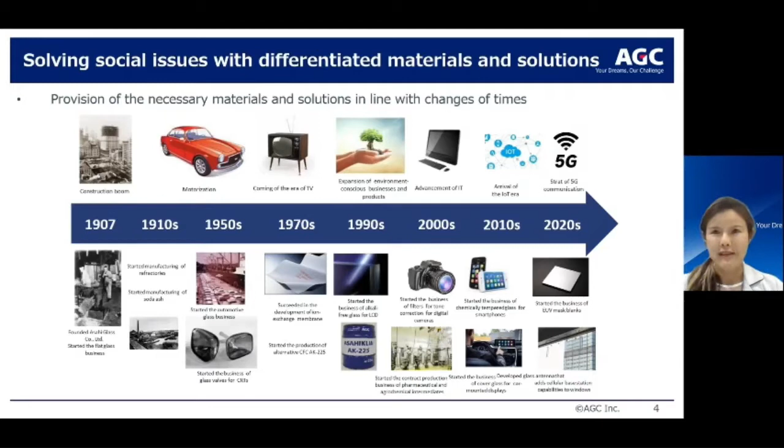To realize our Vision 2030, AGC Group aims to create a sustainable economic and social value by transforming our business portfolio. In addition to meet our financial targets, we also want to achieve a balance between business growth and realization of a sustainable society.

We will strive to achieve the sustainability mission in all our business activities and contribute to the resolution of these 5 key social issues. The AGC Group aims to achieve net zero carbon emission by 2050 and pledge to reduce our total CO2 emission through energy saving and energy creating products. Specifically, a 30% reduction in greenhouse gases emission by 2030 and a 50% reduction in greenhouse gases emissions per unit of sales to realize a sustainable global environment.

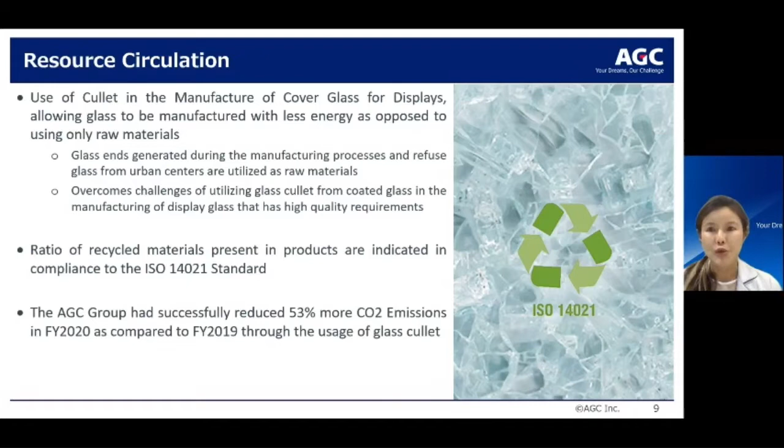The ratio of recycled material present in products is indicated in compliance to the ISO 14021 standard. The AGC Group has successfully reduced 53% more CO2 emission in the year 2020 as compared to 2019 through the usage of glass cullet.

In response to the need to balance realizing low global warming potential whilst maintaining the energy conservation performance of refrigerants for air conditioners, AGC has created AMOLEA products that contribute to the environment. This is a next generation fluorinated, non-flammable refrigerant and non-flammable solvent with low environmental impact while keeping high performance effect. AMOLEA series received the Minister of the Environment Award at the Japan Association for Chemical Innovation Green and Sustainable Chemistry Awards in 2020.

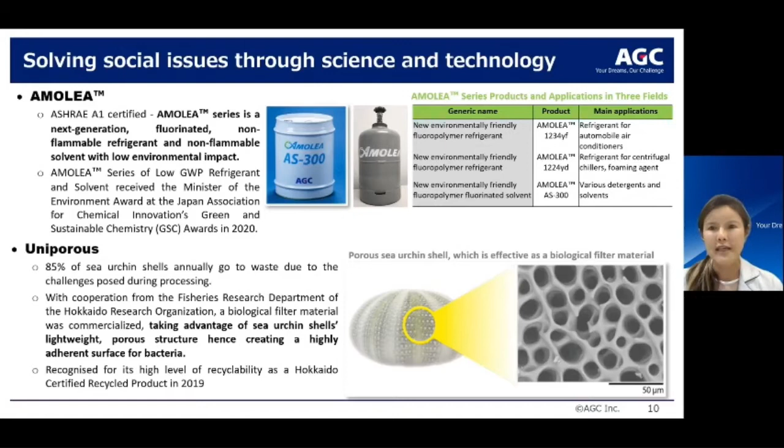Uniporous, on the other hand, is a biological filter that is made from sea urchin shells. 85% of shells go to waste yearly due to the challenges and time required during processes. We aim to resolve this social issue with the cooperation from the Fisheries Research Department of the Hokkaido Research Organization. Uniporous was recognized for its high level of recyclability as a Hokkaido certified recycled product in 2019.

In a bid to reduce freshwater consumption, the AGC Group is promoting wastewater recycling alongside a reduction in clean water usage and wastewater through water filtration. As part of our efforts to prevent water pollution, we have established wastewater control targets that are tailored to the characteristics of each site.

These are the result of our efforts to utilize water resources more efficiently. 85% of water used for cleaning and cooling in production processes are seawater that are used for indirect cooling. The amount of fresh water recycled or cascaded in the production process is equivalent to approximately 16 times the amount of fresh water used.

In summary, as part of AGC's commitment to creating a sustainable future, we have outlined the fundamental approach as follows. To establish a long-term goal of achieving net zero greenhouse gas emission by 2050, promote zero landfill, and continue steady progress to reduce the amount of waste generated.

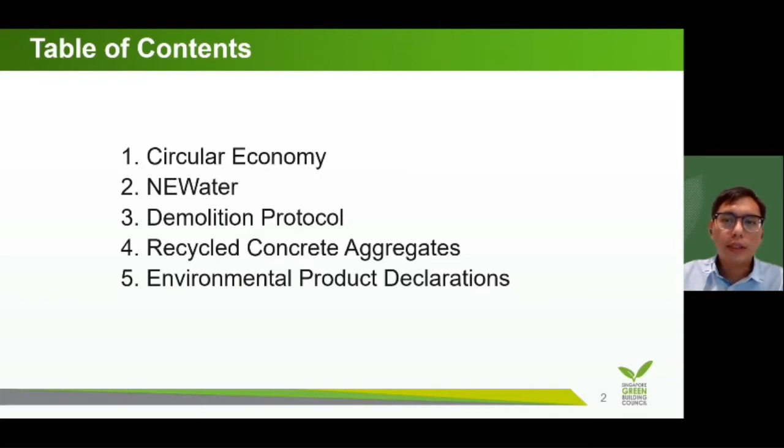So let's kick off with the circularity aspect. Circularity is essentially addressing the shift from a linear economy model to a circular economy model. In a linear economy, resources are used in a straight line from extraction of Earth's raw materials, moving to the in-use phase, before reaching the end point as disposal of waste goods and materials. In this model, resources are extracted and designed for single-use life cycles.

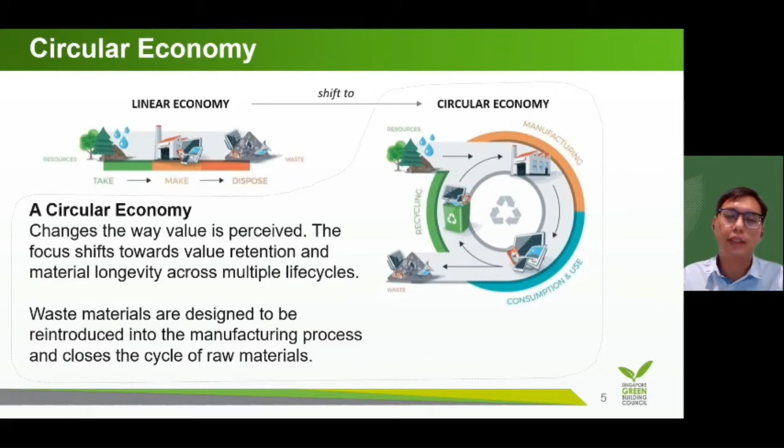And that really is what circular economy is all about, right? The purposes are to address scarcity of resources, balancing out too much demand for too little supply. It is to use resources more efficiently, more effectively, and to reduce waste and to reduce environmental impacts.

So now that we've talked about circular economy, let's move on to the Singapore case studies. The first one is Newater, just to bridge it a little bit. Newater is actually the third of Singapore's national taps, the 4 sources of water that we have. Newater was launched in 2003 to the public, and it is a concept whereby used water from households and industries are reclaimed, and they go through a purification process before reintroduction to our water supply.

So the purification process is a 3-step approach involving microfiltration, reverse osmosis, and then ultraviolet disinfection. Now, the Newater that is resultant of this process is actually used in industrial estates, commercial buildings mainly. In times of dry periods, this can also bolster our local catchment water as part of our potable water supply.

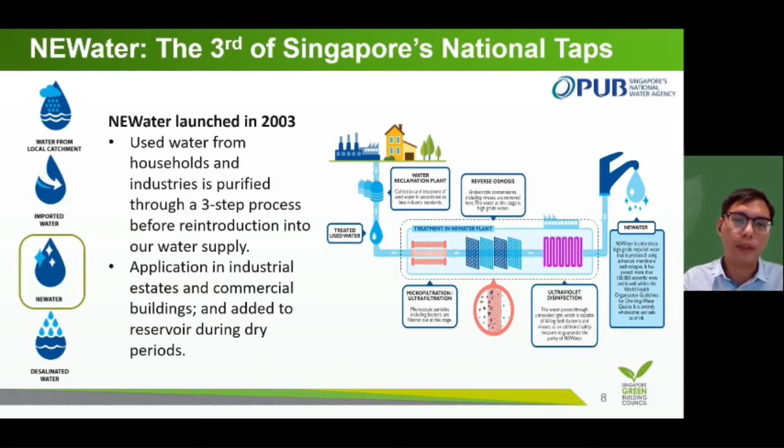Currently, Newater supplies up to 40% of our national water demands, as compared to, for example, desalinated water, which is 25%, or imported water, 50%. So you can see that we are trying to ramp up the capabilities in Newater by 2060 to become more self-sufficient as our water agreement with Malaysia ends in 2061. So it is a national strategic item that also encompasses the circular economy model of reintroducing used water back into the water loop.

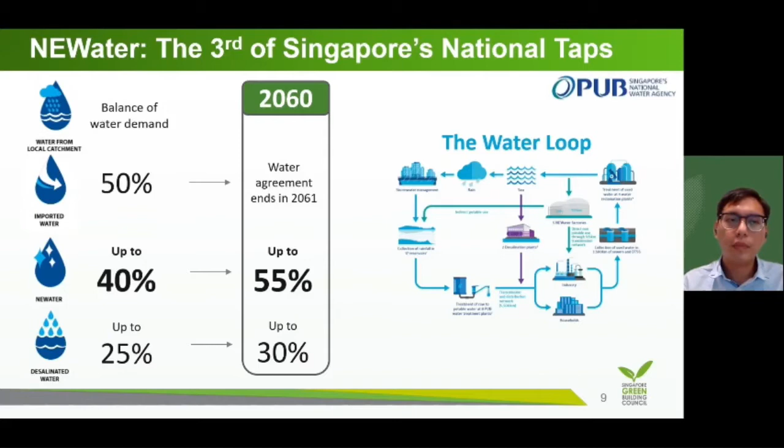The next case study, more for the building industry now, is on recycled concrete aggregates. Recycled concrete aggregates are alternative materials to the raw aggregates or more raw concrete fines that is used in cementitious products or concrete mixtures. But before we jump to recycled concrete aggregates, we first need to understand a little bit about the Demolition Protocol. The Demolition Protocol is captured in the Singapore Standards, SS 557 2010 edition, Code of Practice for Demolition. This has actually been in use under a different name since 2002.

The key three items here are: one, the pre-demolition audit; two, the sequential demolition; and three, the site waste management. These are very important items under our demolition protocol.

The demolition audit happens when a building is identified for demolition. We first do a stock take and inventory of the materials in that building, identifying what is reusable, what is recoverable, what has been contaminated, and what has to be disposed of. We run through the whole list of building product categories such as pipes, wiring, concrete, and bricks to sort and note what can be recycled.

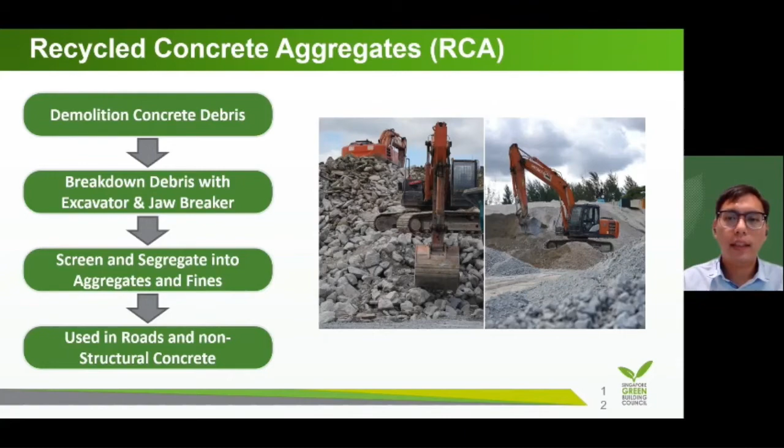But let's take that one step further and talk about the Samwoh Eco-Green building. Samwoh is a builder and contractor, also part of SGBC members, and they initiated a research project collaborating with public agencies and institutes of higher learning to study and investigate more about recycled concrete aggregate concrete.

The study found that when comparing traditional concrete versus concrete containing RCA, there's actually an insignificant difference. Structural monitoring results also showed that deformations were within theoretical deformations. The study concluded that RCA concrete can be designed for structural application.

And this is where the birth of the Samwoh Eco Green Building comes about. For all the concrete components of this building, they were actually made with RCA concrete, not traditional concrete. Even more so, the RCA concrete is actually found to be up to 100% RCA rather than fresh raw material aggregates.

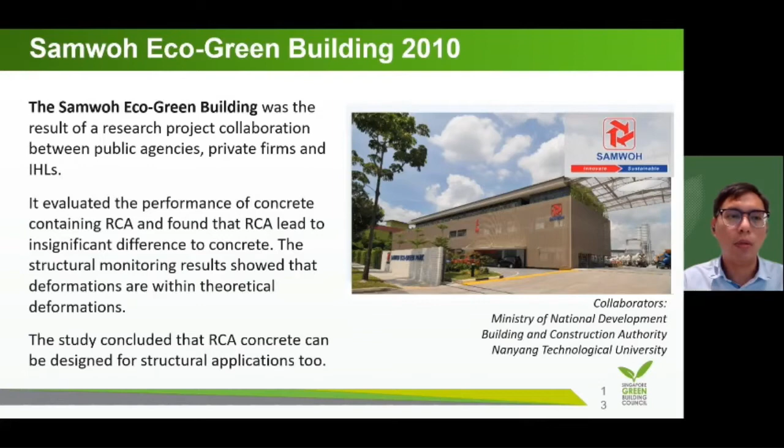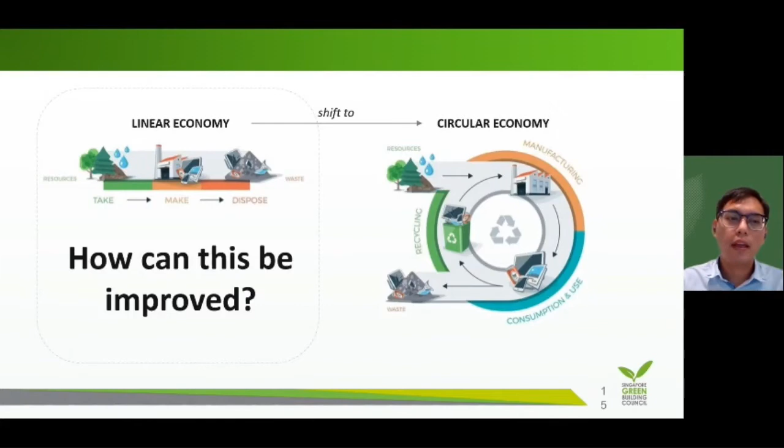I hope those two case studies have painted a picture of circularity in application in Singapore. Let me quickly move to resources and environmental product declarations. This becomes important because we have to acknowledge that not all materials can shift so quickly into a circular economy model. The key question becomes: how can we improve materials still trapped in the linear economy model? Compound onto that, carbon emissions of buildings — buildings are known to account for 39% of global carbon emissions.

In operational carbon, we know there is time to improve it due to advances in technology and shifts to renewable sources of energy. But there is not enough activity or initiatives on the upfront carbon aspect. Unlike operational carbon, the upfront carbon or embodied carbon performance cannot be improved over time — it is simply locked in upon building completion.

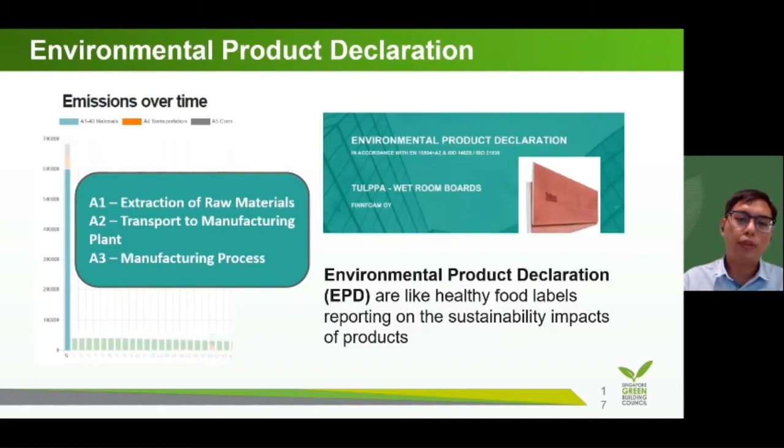This is where environmental product declarations can fill the gap. They are like healthy food labels that report on the sustainability impact of products. In comparison to healthy food labels that talk about sugar, fats, or protein, environmental product declarations have a series of environmental performance indicators.

If you look at the image on the right, I've singled out the GWP. GWP stands for global warming potential, and it tells us how much embodied carbon there is in this product based on its life cycle stages. This is measured in kg CO2e per unit of product, and this is like the currency we can use to compare products against one another.

So if you have, for example, two carpet products, you can use the GWP or kgCO2e amount to compare which of the two carpets has a lower carbon emission. You can see this is an enabler for suppliers to review and improve their products and processes to lower embodied carbon, and also an enabler for building project teams to select products that are lower in embodied carbon.

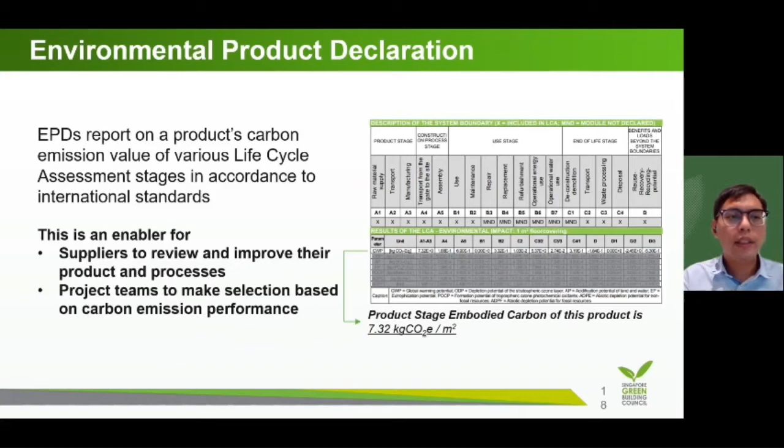So this will then help to decarbonize our built environment, especially on the embodied carbon front. It's a very short one. I could go into more detail, but I don't think we have the time for it.

I will leave you with a picturesque image of another angle of our CBD area, and wish you all a good day. I hope you enjoy this picture. For those who have not come to Singapore, here is what we have in a nutshell.

Thank you. Indeed, we really welcome you to come to Singapore. This is where the Garden City is, and we just celebrated our National Day. So yeah, welcome to Singapore.

Thank you to AGC and SGBC for sharing about their program. Moving forward, we will see how resource and circularity give us the opportunity to bring a lot of different resources together. Compared with climate action, resource and circularity seems more diverse, but it's also an opportunity for us to connect the dots and form a big picture.

Coming to connecting the dots and forming a big picture, I'm delighted to introduce this most resourceful partner of World Green Building Council. I don't think there's a second one to compete with this. She is no other than Miss Esther. She is really very resourceful, bringing all the happenings around the region, even around the world, and circling everything back to this core vision of what we want to achieve together. She's definitely our best friend in the Asia Pacific, also at World Green Building Council.

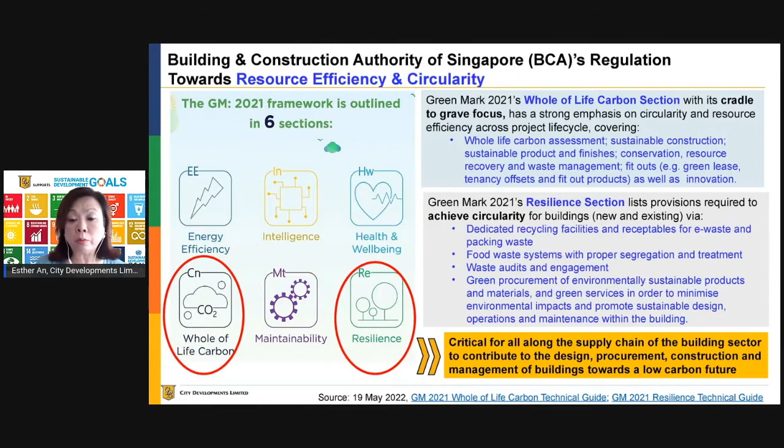And of course, these are some examples that we want to show that it is doable.

We all talked about the high impact already. Let me refresh it: close to 50% of global energy-related CO2 emissions is contributed by building and construction activities. Approximately two-thirds of our global building area that exists today will still exist in 2040. And by 2060, global building floor area is expected to double. If today we're already overdrafting our carbon budget, can you imagine if floor area doubles by 2060? What will the world become?

There is really an urgency for the real estate sector to align with global goals and accelerate our action by adopting a life cycle approach. How can we do it? We can't do it alone. We have to collaborate, innovate, and apply technology that is effective. But we also need to look at setting goals and measuring. Without tracking, without measuring, you can't manage.

That's why we adopted the global goals set out by the World Green Building Council, to reduce at least 40% of embodied carbon emissions by 2030. CDL's goal is actually to reduce by 41% by 2030, aligned with our science-based target initiative validated to a 1.5 degree scenario. All these are joining the dots together. If you want to keep global warming within 1.5 degrees, you have to set more ambitious targets. So in February 2021, we set the net zero target, and at Glasgow last year, we committed to support the World GBC's whole life carbon cycle.

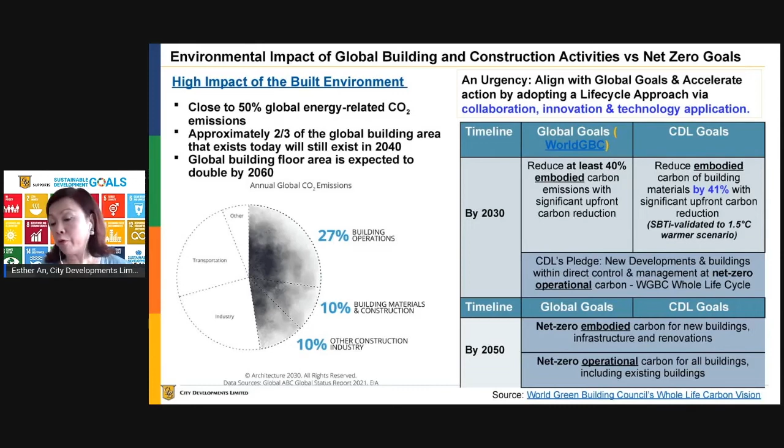The timeline we're looking at is also 2050 - we have to look at net zero embodied carbon for new and existing buildings, renovation, retrofitting, etc. Operational building carbon footprint is also very important, accounting for almost 30% of global greenhouse gas emissions. So as a landlord, we need to look at how we can retrofit and maintain a high level of energy efficiency and resource efficiency.

No point setting the target but not providing any guidance. So this is our so-called 3S green building framework, providing guidance for higher operational efficiency, low carbon and cost-effective building materials, and a livable and healthy environment. How can we help engage the whole ecosystem of stakeholders to achieve super low carbon performance, smart building, and sustainable building?

Under sustainable building, waste minimization and circularity is a key criterion. For CDL, we're very glad to have started our sustainability journey as far back as 1995. At that time, our focus was really on how do we conserve. But today, just conserving and mitigation is not enough - we need to look at regeneration, circularity, and how we integrate under our value creation business model to transition to low carbon emission.

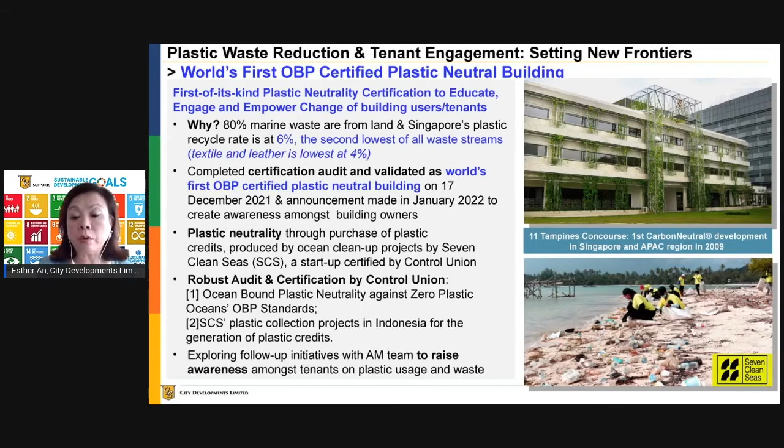This is a very first-of-a-kind plastic neutrality certificate to educate, engage, and empower change of building users' and tenants' behavior. We partnered with an NGO called Seven Clean Seas and a few globally certified plastic agencies. Tampines Concourse has achieved the first carbon neutral development in Singapore and the Apac region. Not just carbon neutral, but also plastic neutral, and why plastic, I have already explained earlier.

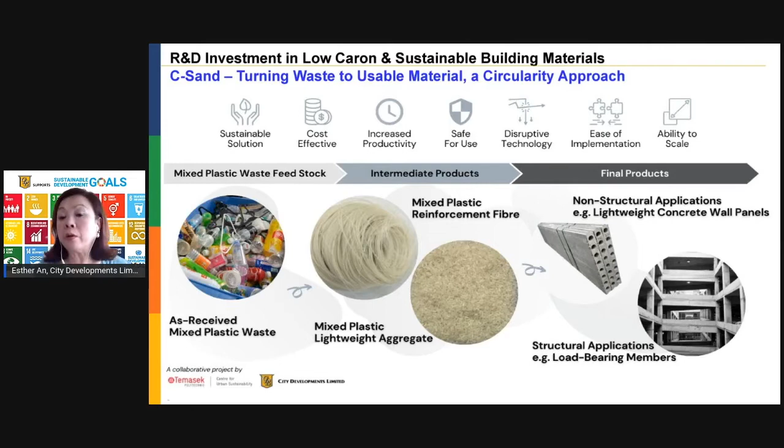Nothing will change if we don't invest in R&D, research and development. So we have engaged some academics and NGOs to look into low carbon sustainable building materials investment. This is one example, still a work in progress, called C-Sand, which is a sustainable alternative, turning waste into usable building materials and really putting the circularity approach into reality.

But we are very stringent in selecting social and startup. We hope that by engaging young people, engaging their creative minds, we can add to the industry's efforts, and hopefully we can all enjoy a net zero future. Thank you for your attention, and we'll be happy to share more.

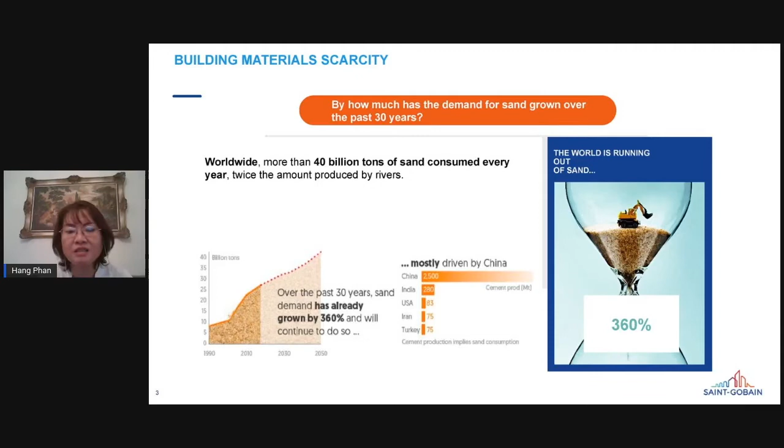In Southeast Asia, the situation is even worse because we have a lot of hydropower plants upstream that are worsening sand production for the countries downstream at the delta. More than half of the world's construction will happen in our region, so it is really a challenge for us, and the world is running out of sand. That is just one critical example of a key material for us.

I come from Saint-Gobain, a building material manufacturer, and it is really a dramatic problem. Resource scarcity is already bringing up costs, and it impacts directly on our competitiveness. For our survival, securing access to resources becomes more and more crucial.

We can't rely forever on virgin raw materials. We need to find alternatives to replace virgin non-renewable resources, and we need to do it now. Otherwise, we will face operational disruption. So it is not only about doing good, it is also about business risk.

So how do we tackle resource scarcity? In the previous presentations, all the speakers highlighted that when you connect the dots, circular economy is a very important element in the whole picture of circularity. Yes, circular economy is an enabler for sustainable development, as well as the net zero carbon future we are aiming for. So for us, we see circular economy as an effective way to address resource scarcity and at the same time bring down CO2 emissions.

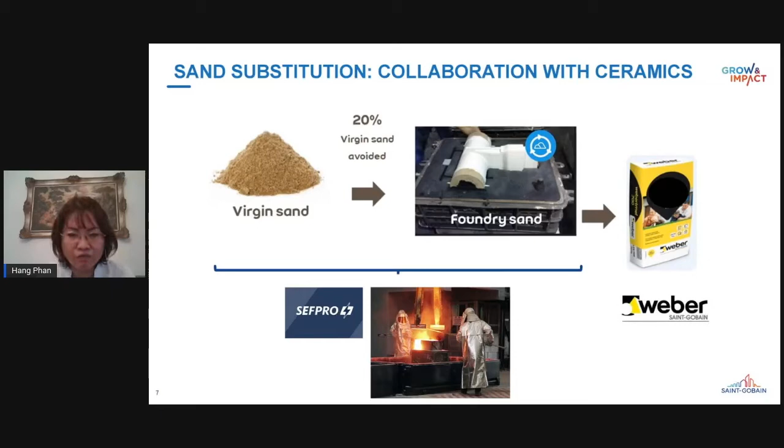For sand substitution, we collaborate with other businesses like ceramics manufacturers. To produce foundry molds, ceramic foundry companies use sand in their molding process, and after the foundry part has been cast, this sand can be recovered to be used in other businesses. We work with a company in China, SEFPRO, a foundry manufacturer, to recover foundry sand from their process to use in our mortar, under the brand name Weber. Through that, it helped reduce 20% of virgin sand use.

Now the cement substitution, which is more crucial and more difficult for us. Our strategy is to use waste from other industries, so it is a kind of external recycling. Here are two examples.

This slag, after the grinding mill process, becomes so-called GGBFS, which means ground granulated blast furnace slag or slag powder, and this can be used as a substitution for cement. This is processed by the steel manufacturer, and is available in big quantity in China, like 100 million tons, and we are using it as a substitution for cement.

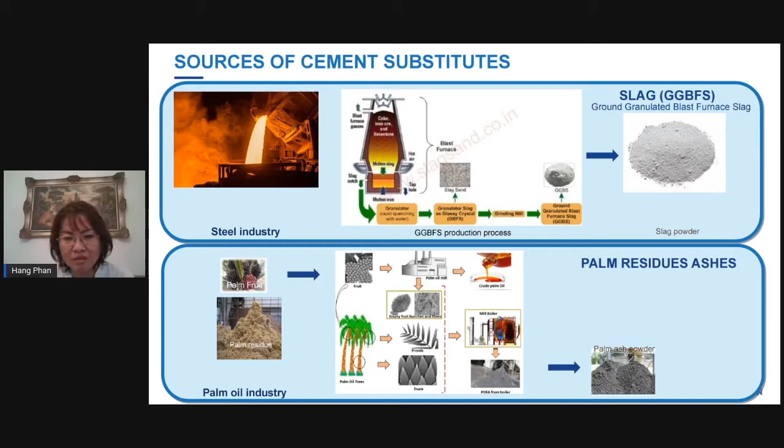The other source is the palm oil industry. The palm residue comes out from palm fruit processing, and when this is burnt, we receive palm ash powder, which can also be used as a substitution. This palm ash can be found in several different countries in the region. So these are the two main sources of waste that we are using in the region.

But one thing to keep in mind is that when we use waste as a resource, it's not straightforward to put into production. You can't just fit it into the production line - there's a lot of things to be considered. So here is our conversion process.

You know that waste cannot be transported too far for cost reasons. Normally the manufacturer has to consider what is available near the plant, let's say 80 to 100 kilometers away - what waste material is available that we can use. Then the regional R&D team has to characterize the waste, understand its components, and develop the binder and formula to suit the mortar application. So it's a team collaboration between the local team and the regional R&D team working together on this process.

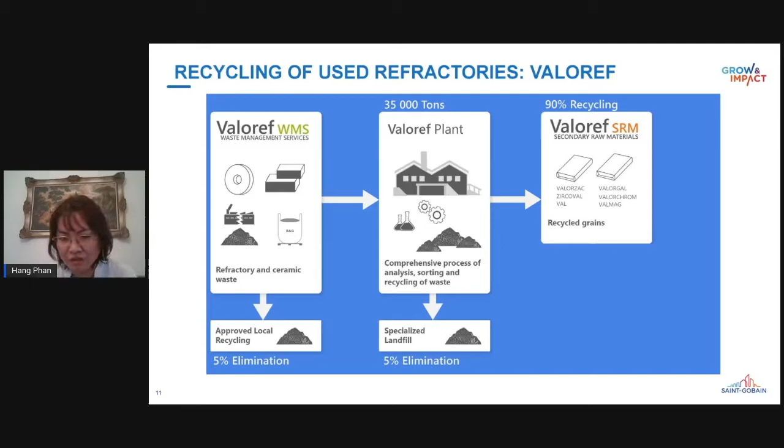So this is an ongoing project for us. You can see that circularity is a triple hit for a manufacturer like Saint-Gobain: it addresses the risk of operational disruption by providing an alternative to virgin raw material, helps reduce carbon emissions and address scope 3 emissions for developers, and also helps reduce operational costs. So this is not only good for the environment, but also good for business.

To do this, collaboration is crucial. Katrina mentioned collaboration as a keyword in the WGBC slide, and I totally agree, because no one can embark on this journey alone. Through my example, you can see that we have to work with partners, and innovation is the key enabler for us to really be able to get into this journey.

I hope that my practical example is helpful. If you have any more questions, you can contact me, my contact is here. Thank you very much for your listening.

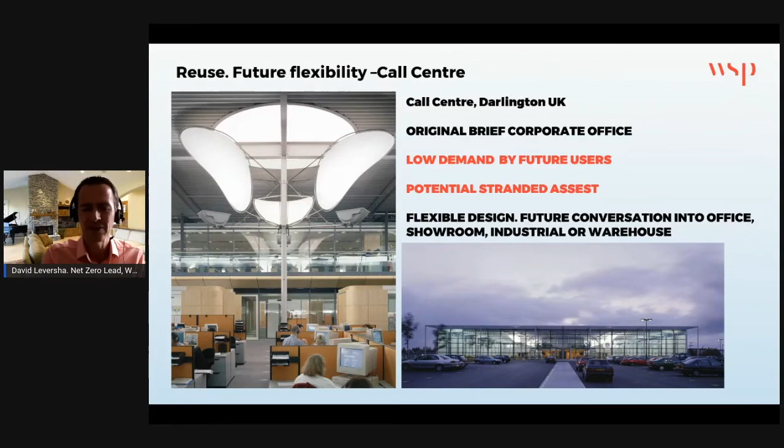So that's a key thing that we need to be looking at: how do we design our buildings for future flexibility? That's one really good example. The second example is how do we repurpose, how do we retrofit?

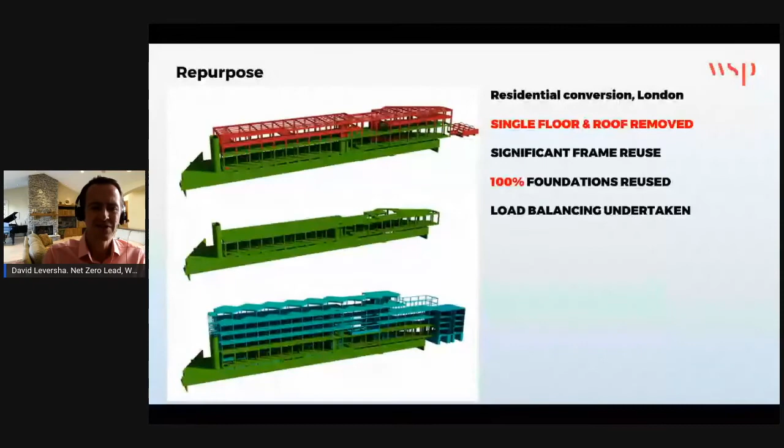This was a residential conversion in London. It was originally some offices, but what was undertaken is the single floor and roof were removed. A significant amount of the remaining structure, shown in green, was left in situ, along with 100% of the foundations. A significant load balancing exercise was undertaken, and 3 additional timber floors, seen here in light blue, were added.

This is important because, again, how do we reuse and repurpose our buildings? In the UK, one of our targets is 300 kilograms of CO2 per meter squared for new build residential buildings. The upfront carbon of this project, taking into account all of the floor area, was 137 kilograms of CO2. And once we factor in carbon sequestration, because those 3 floors were made out of timber, we came in at 34. So that's a really good example of looking at your existing asset and making it work really hard.

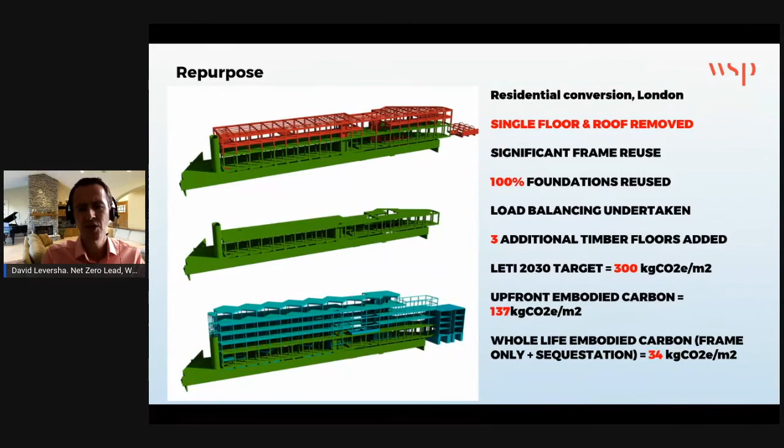So those are just 2 examples. But the bulk of my presentation looks at how do we enable circular steel's circular economy potential. This really demonstrates the power of collaboration and sharing. I read an article in the Structural Engineer magazine at the beginning of last year, and it really illustrated that there is no technical reason why we should not be recycling our structural steel.

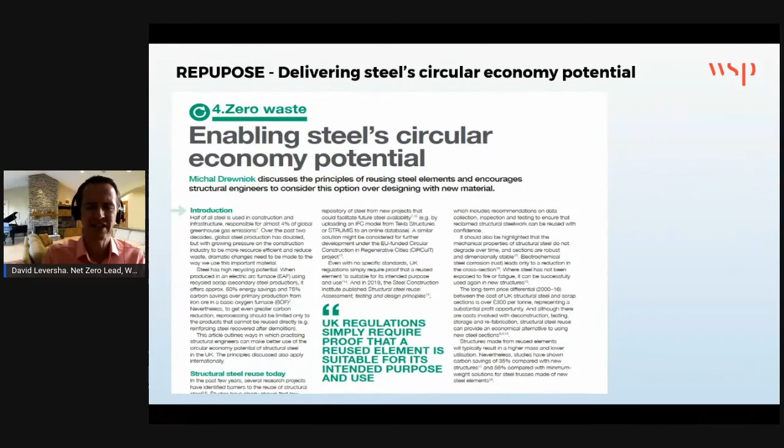However, the authors could only find 12 examples of where this had actually been undertaken in the last 20 years. This is what generally happens to structural steel when a building is demolished: it is cut up into 4-5 foot long sections, meter long sections. It is then sorted and distributed around the world to go into electric arc furnaces, smelted down and reformed into structural steelwork, or cars, or pens, or washing machines, etc.

Now this really was quite disheartening, and I started thinking, right, we need to do something different about this. So I reached out to one of the major material recyclers in Europe, a company called EMR, and they stated that in any one month they have 100,000 tons of structural steel going through their processes.

There are no technical challenges to reusing structural steelwork, we just need to go through a testing process. One of the key data points, and this is always important, understanding where the data is, the scrap value is about £250 per ton, so that's about $280 per ton. But to buy new steel is about £850 per ton, i.e. $950 per ton. So there's a massive price point there that you can utilize to overcome all of the challenges that you have.

However, to try to disrupt the market, because this is not undertaken widely, we needed 2 angles of attack. We need to collaborate with all parts of the supply chain to build new processes. But the supply chain aren't going to build up all these new processes unless they can see there's actual demand. The second angle of attack over the last 15 months has been actually building that demand by illustrating that active projects want to reuse steel.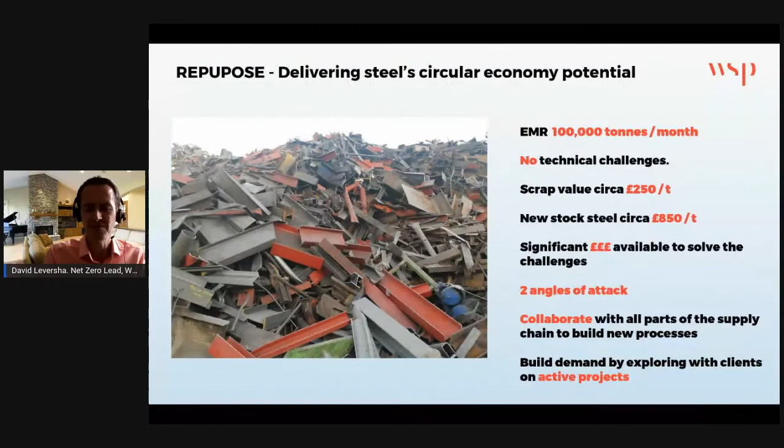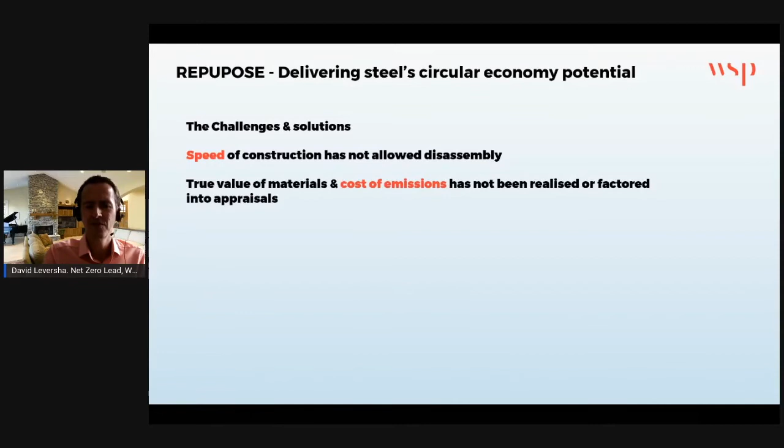So, some of the challenges: speed of construction has not generally allowed disassembly. The moment a client wants a new building built, they want the old building that was on that site demolished as quickly as possible. The true value of materials and the cost of emissions has not been realized and factored into appraisals.

Who controls the quality assurance associated with testing and the stockpiling of that reused material? The ease of designing and specifying, procurement and fabrication is always a challenge in terms of how do you take this reused material and put it into a new building. Matching the supply and demand, but also the aesthetics. So those are some of the challenges, along with insurance and the QA process. But the QA process eliminates that risk because it's suitably tested.

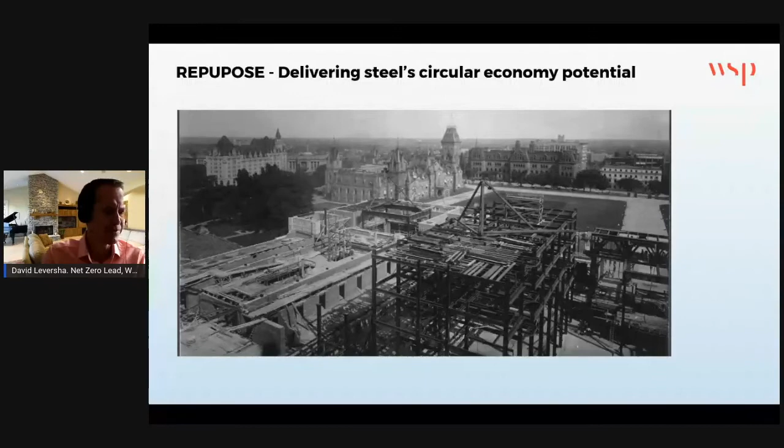So, 2 examples that I've got here. We're working on the refurbishment of Centre Block, which is the Canadian Parliament building built in 1920/1921. This is a picture of it when it was being originally built 100 years ago, with that significant structural frame, as you can see there.

So a significant part of the works there are reforming the whole of that building and reducing the operational carbon to 0. But those areas in the yellow and the dotted red lines are the areas that were earmarked for demolition.

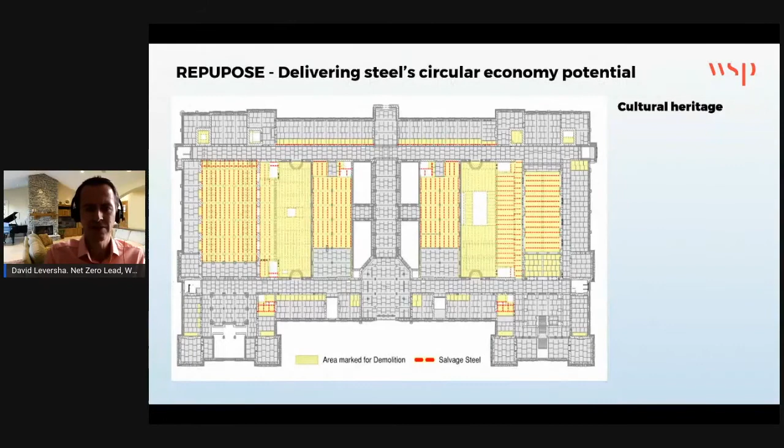And what we started looking at is that structural steel that is there. Can we harvest that and then reuse it elsewhere on the same development? And yes, we absolutely could. So what we identified, there was 4,500 structural steel elements that would be removed.

We undertook extensive testing to prove that the steelwork could be used. The Canadian Building Code allows for a certain strength to be utilised, but we did test against that. And currently, at this moment in time, we've identified 1,700 reused elements, and that's going to be about 25% of the new build elsewhere on the site. And that is saving 750 tons of CO2.

Now, really, we're still going through the other 2,800 elements to see where else we can reuse those. So this process is currently ongoing, and this really is proof of the principle.

Close to home in the UK, where I sit, we have a commercial office, and we're working with the UK supply chain to look at how we can extract. So from EMR, they're starting to build up an inventory now of the structural steel elements. They are stockpiling and testing. And at this moment in time, we've identified about 50% of this new build can be used from that stockpile that's been built up, and that's about 187 tons. And that is saving in the order of 300 tons of CO2.

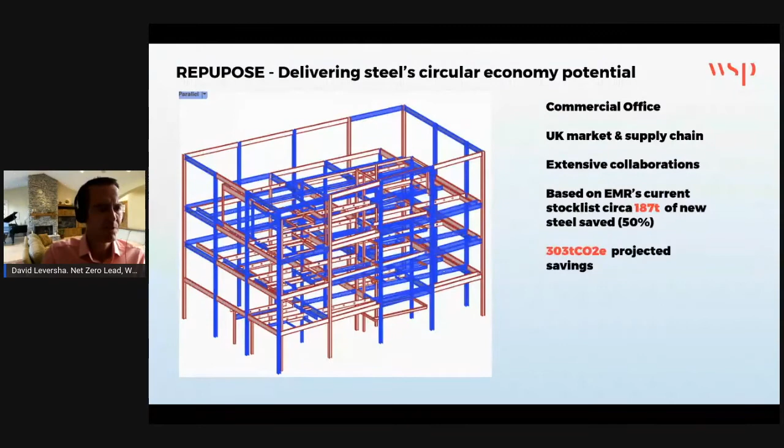So putting my section to a close, because this really is about trying to incentivize everyone to look at those no-brainer items and those ideas you have about this is a really good idea. How do you go about doing this?

This has been an 18-month journey that we've been on. At WSP, we now have multiple projects where reused steel is being deployed and being explored. Momentum is really building now to start working with our clients to look at, rather than demolishing buildings, how can we deconstruct those buildings to retain those elements at the highest value state?

There was a conference held in the UK by the UK Green Building Council back in July. There were over 100 attendees there, which is fabulous. The whole supply chain and clients are now getting engaged. And really, one of the cherries on the cake is EMR, that steel reprocessing company that I talked about earlier.

They've just produced their EPD, and someone mentioned earlier the importance of environmental product declarations. That illustrates that the reuse of structural steel actually costs 47 kilograms of CO2 per ton, compared against a UK average of 1,580 kilograms, and this varies around the world. So that is a 97% saving on carbon if you can reuse structural steelwork.

So you combine that with the cost element that I mentioned earlier, between 250 and 850 pounds per ton, and you can see this is a complete no-brainer, but the whole supply chain needs to be amended to allow it to actually occur. To put this into perspective in terms of the quantum, if 100% of EMR's monthly scrap could be diverted and reused, just in the UK alone, and this is one material supply chain, that's 1.8 million tons of CO2 that can be saved. So there's a significant amount that can be challenged and attacked here.

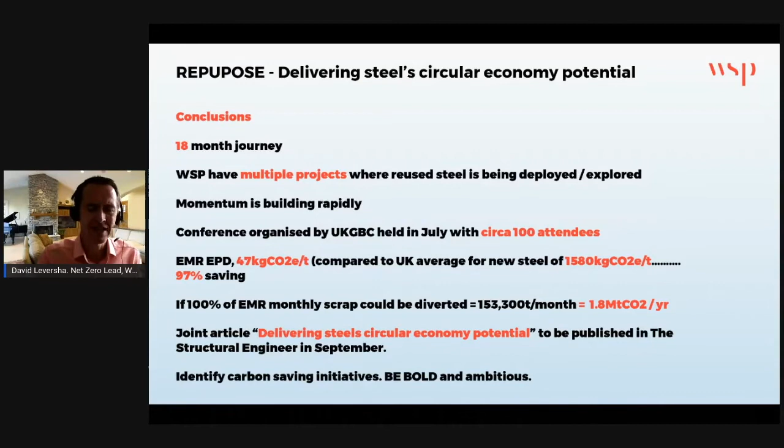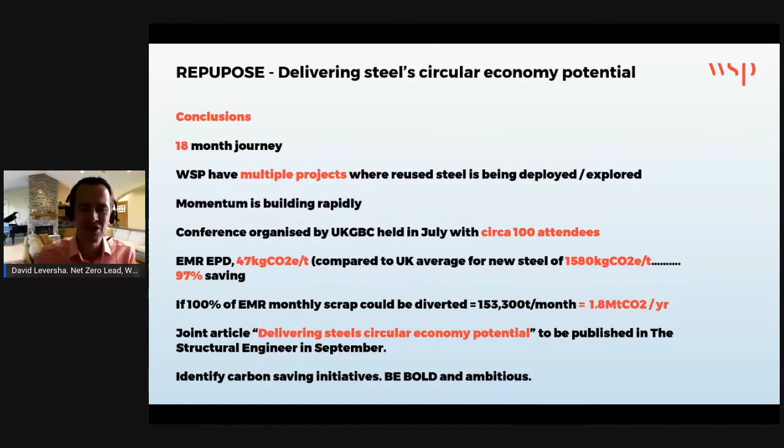So my message to everyone on this call is, if you think there's an item that is a complete no-brainer, if you've identified where there's significant carbon savings that can be made, be really bold and go for it, and you can make a difference. So thank you very much indeed.

Back to you, Joy. Thank you. What a bold adventure as well, and such a strong statement that when we're looking at something close to home, close to our hands, there's a lot of gems that we can pick up. Yeah, that's great. Thank you.

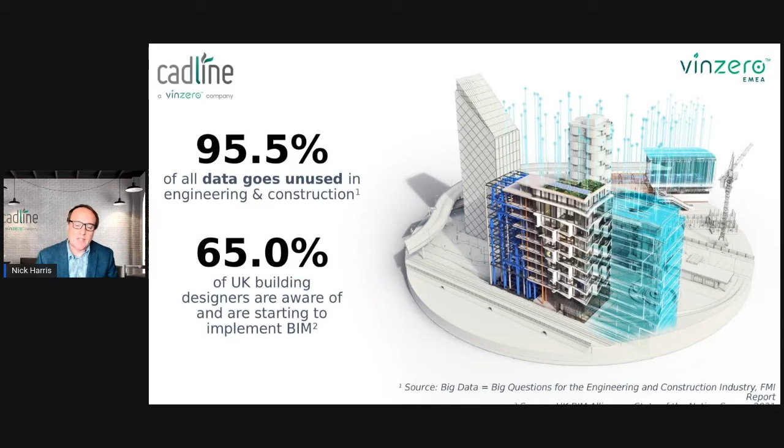However, we're now in a new phase of digitalization of construction, where we must take advantage of the data we have at our fingertips. We started with the transition from paper to digital, followed by building information modeling that delivered better productivity and project visibility. Most recently, increasingly complex projects and the impact of the global pandemic have accelerated the adoption of cloud-connected BIM, which allows us to share and review project data instantaneously and even work on the same building model simultaneously, regardless of where we are located.

In this fourth phase, we are in an era in which data will be more centralized and flow more fluidly among project stakeholders. Insights will be driven from the performance data generated at the operational phase that will allow us to make better decisions at the planning and design stages of the next project.

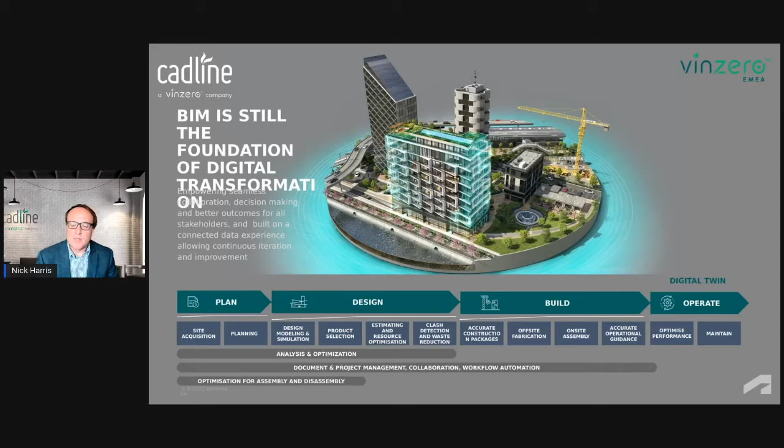The project information we procure right from the planning phase must be fit for use in the digital twin that will ultimately be the tool that will allow us to collectively learn from the performance of our buildings, our cities, and our infrastructure.

And design simulation lets stakeholders use the insights they gather in designing, building, and owning a structure. This is where technologies such as generative design, AI, and machine learning, which are already available in BIM tools such as Autodesk Revit, add value. Every insight they capture can inform the next building they develop.

For example, AI can help the architect and engineers optimize the design for a school based on designs for hundreds of schools of similar sizes, regions, and requirements. The system can incorporate tools such as social listening, capturing sentiment about those other schools from the comments and ranking on social media. That sentiment data can inform future decisions when the architect needs to retrofit a building or generate a new design.

Software vendors like Autodesk are now testing even more advanced sustainability analysis functionality embedded directly in their design products for both building and product designers. They give feedback on common measures, as well as circularity measures such as the cost of disassembly and the use of material reuse after demolition.

The adoption of modern methods of construction is also highly reliant on the digitalization of the design process and the use of intelligent digital models. We are continuing to learn from the manufacturing industry on how to optimize our use of resources through lean manufacturing techniques, standardization, and reuse of components and assemblies.

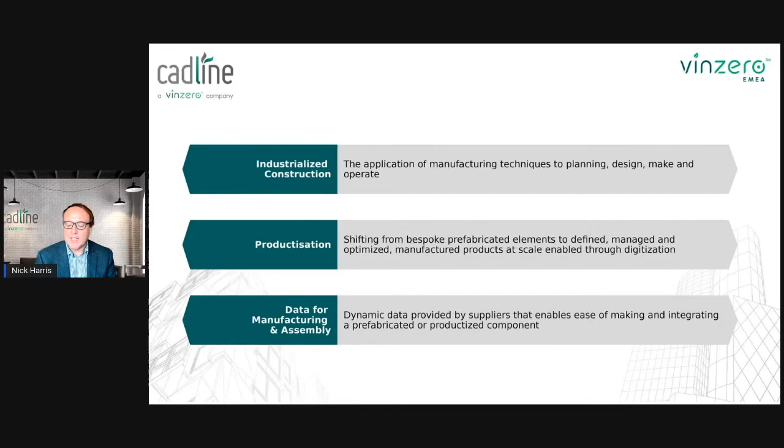By thinking about how building components can be disassembled and including that guidance in the BIM model, we are providing the builders of the future every opportunity to make the best use of the bank of material in our assets. For example, the removal of adhesives that make the reuse and recycling of building components more difficult requires some engineering effort. We have the technology to allow designers to digitally re-engineer their products and use complex analysis to verify their structural integrity and performance without the need to fabricate multiple physical prototypes.

And at the heart of the BIM design process is the assembly of digital components and materials that exhibit the properties and behaviors of their real-world counterparts into a building model. Consequently, manufacturers play a vital role in the push to net zero, not just the design and production of their output, but by making rich product data available to their customers.

If we are to make material and energy passports pervasive, we need the support of all manufacturers, and we're starting to see some progress here. We recently worked on a project with a drywall manufacturer, a notorious source of waste in the construction industry, to allow contractors to use a BIM model to optimize the use of standard panels and place accurate orders with the manufacturer. We developed a plugin for Autodesk Revit that connected directly to the manufacturer's online catalog that allowed the designer to evaluate and specify exactly the right product for the application whilst delivering the most sustainable design.

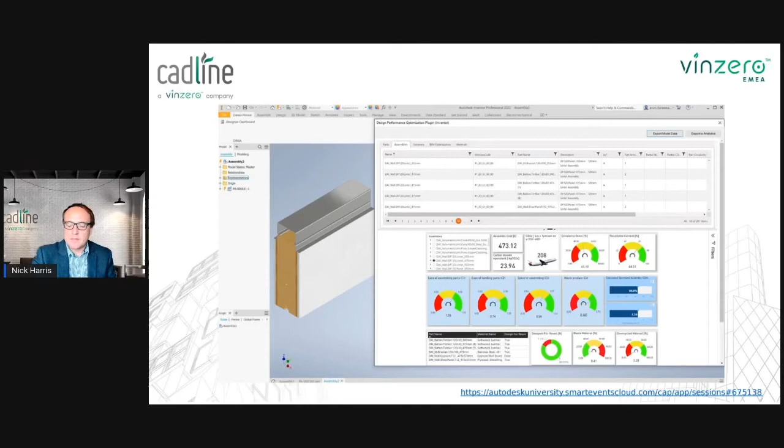Now, product designers now have access to advanced AI technologies such as generative design right within their current design environment, which allows them to take material and resource optimization to the next level. Over-engineering components can represent a significant source of material and energy waste. Now, by allowing the cloud to come up with the best design option, coupled with additive manufacturing techniques, we can reduce the amount of virgin resources used in building components.

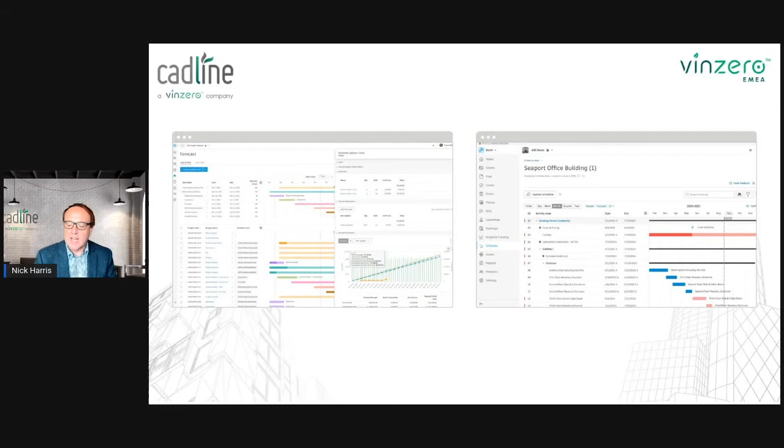Powered by the cloud, the next generation of construction management technology allows us to take the pre-construction building model and use it to make accurate decisions on site. A better flow of information into the construction phase inevitably results in fewer errors, rework, and material waste. However, the accuracy of the information that's collected during the construction phase and used to augment the information model is also vitally important. At the point of handover, the building information model must include much more data about the construction and commissioning process if we were to hand over a truly effective twin.

Conceptually, a digital twin is a virtual replica of a built asset that is a dynamic digital reflection of its physical self. Bidirectional connections between the physical and digital enable them to possess the operational and behavioral awareness necessary to simulate, predict, and inform decisions based on real-world conditions. Importantly, we can take advantage of that unused 95% of information to plug the gaps in understanding of how the physical asset will perform.

More importantly, digital twins provide an opportunity to transform the built asset lifecycle. We can affect this transition by tracking a digital thread of information that links organisations and data with an end-to-end digital process spanning capital planning, architecture, engineering, construction, asset management, and ultimately circularity. Digital twins can help close the feedback loop that will continuously inform us how best to operate our buildings as well as plan for the future.

Think of the Tesla model. Each Tesla car feeds back information to Tesla about actual performance and driver behaviour. That data is then used by the company to make engineering changes to the cars in production, as well as software updates for cars on the road and optimise their performance. This same approach can apply to equipment in our buildings and furthermore the evolution of our understanding of how our buildings should be reused in the future. And we should be prepared to share our data to better inform a collective understanding of how best to move forward in each city, country, or region.

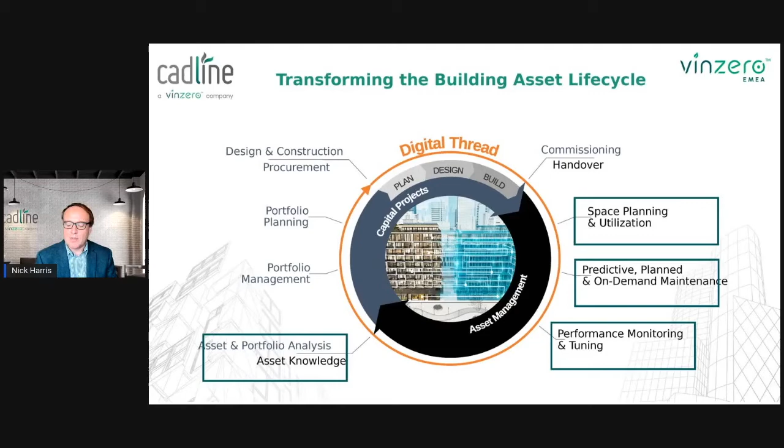Ultimately, in the future, a building information model will not be considered to be complete if it doesn't contain all the valuable information and guidance on how to recycle, reuse, or repurpose the bank of material it contains.

Finally, I wanted to show you the output of a project my colleagues at Autodesk have been working on with a house builder to deliver real-time dashboards displaying how a building may perform as a bank of materials based on the current BIM model. By making changes to material choices in the BIM model, the designer or owner can understand in real time which and how much of the embedded resources will be reusable for future generations.

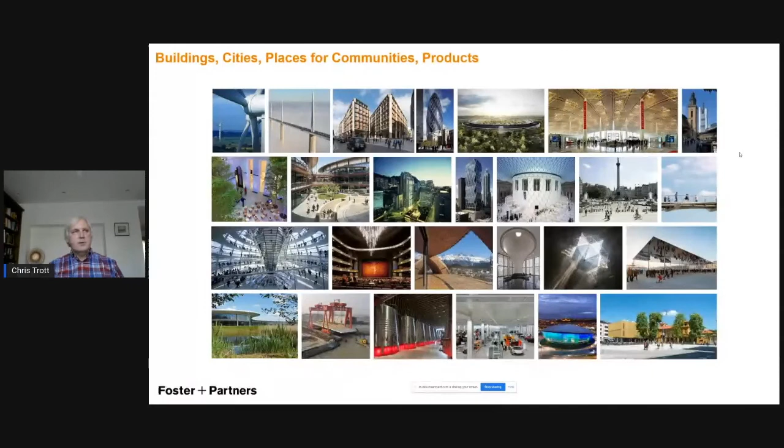For those of you who might not be familiar with us or our work, we design buildings, we design cities, we design places for communities, and we design products.

What I'd say first off is: what are the benefits of circularity? It's about reduced new resource use, reduced carbon dioxide and other waste streams, reduced climate change, increased regeneration of ecology and biodiversity, increased regeneration of other species, and increased value retention in existing assets.

Our first priority, where we have existing buildings, is always to try to retain them through either refit and refurbishment—I'll take you through an example a little later. When new construction is the only feasible option, the priority is to reclaim existing components, reduce the need for new material, and provide resilience for the future.

This diagram takes us through some of the thinking of that process: manufacturing, construction, and then end of use. As I said, building retention is the most important part of circularity—it's what we should always prioritize first. Some component reuse will happen in any case, and that should be the next priority. Ultimately, we should be looking at material recycling.

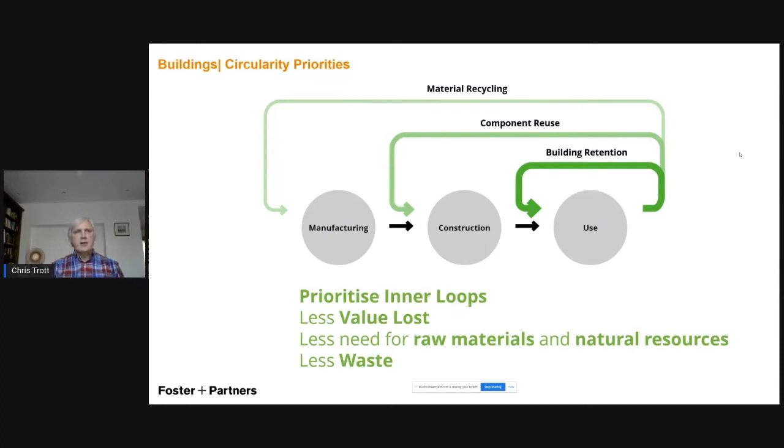If we look at the EN 15978 life cycle, which we've seen a couple of times today, at each point of that life cycle there is something to be gained and contributed to the circular economy—through manufacturing and construction, in use, and end of life.

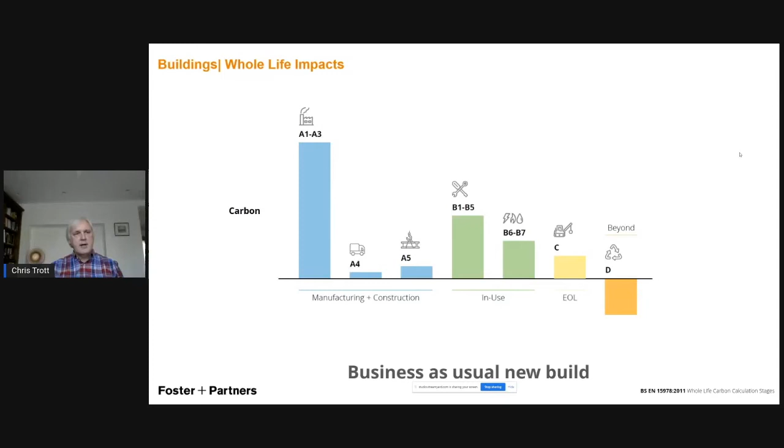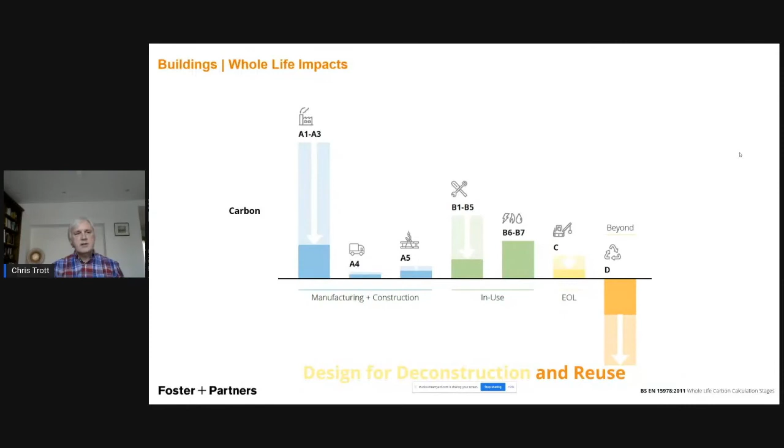In manufacturing and construction there are enormous gains to be made through retaining, reclaiming, and reduced use of materials. During use, what we're looking for is design for flexibility, adaptability and longevity. And at end of life, we're looking at design for deconstruction—which we have to consider right at the beginning of the design process—and reuse of materials.

If we look at this building, Willis Faber Dumas, which we designed in the 70s, flexibility has been the key to retaining it in use throughout that whole period of time. You can see on the left here, originally individual typewriters were used in it, then first-generation desktop computing in the 90s, and then this millennium, distributed servers and distributed desktop technology. By creating a very flexible space, that building has been retained in use for a long time.

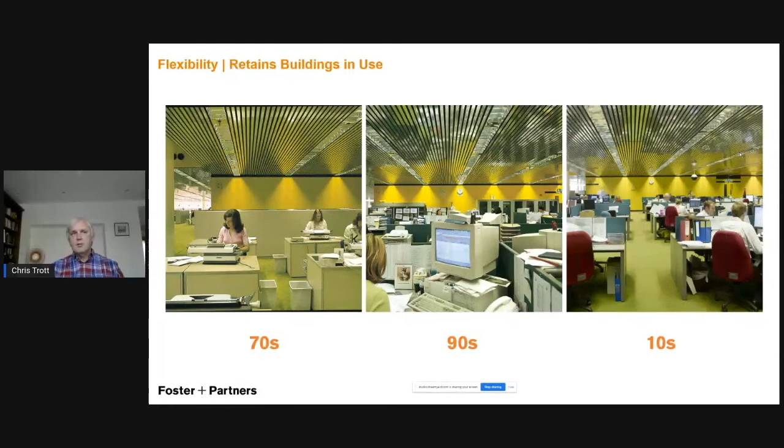I'll talk very quickly now through a building we designed for Acciona, their Ombu building in Madrid. This is written up in the WGBC Beyond the Business Case report, and I'd recommend anybody look at that report. There are many good case studies in it about how to sustainably design buildings.

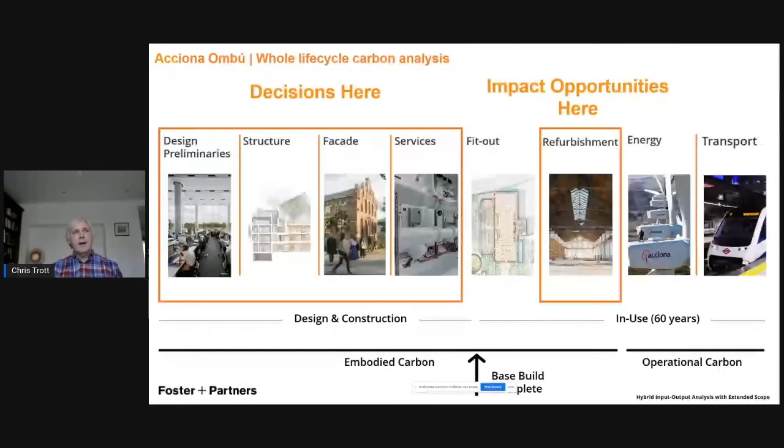We've done, as we do for all of our buildings, a life cycle assessment, and we normally look at 60 years. We look at all of the construction, the refurbishment, the fit out, its energy in use, and how people will travel to and leave the building during use, which we think is very important. The first thing to point out is, in the original design period, decisions made there will obviously impact opportunities for future refurbishment, so you have to think of these things early.

This is a little video that takes you through the building, and it shows that we calculated the embodied carbon of the building at only about 7.9 tons of carbon. We looked at its operational and transport carbon at about 2.2 tons, and we looked at its ecological footprint, and from that we deduced that this is a 2 degrees climate forcing temperature building.

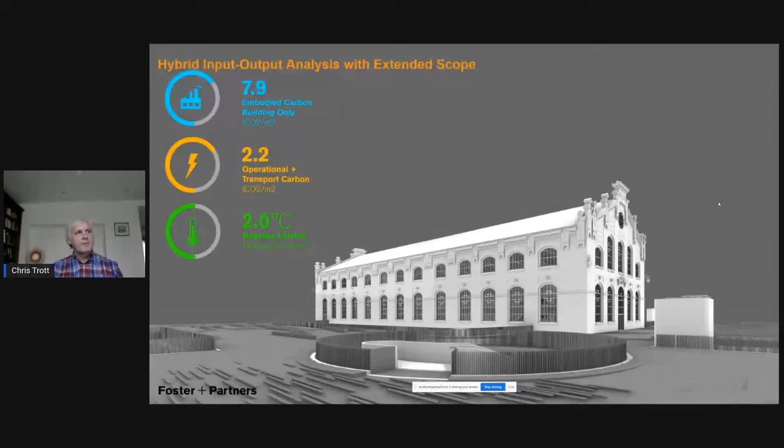Now those numbers are higher than you might often see, because we use a hybrid input-output calculation method, which we think is more truthful in terms of the signal that we get from it.

We also looked at what would happen if we provided new accommodation instead of reusing the building. Had it been new accommodation, there would have been about 12.5 tonnes of carbon. Just reusing the existing building would have been about half that, at 7.9. We did completely reuse the existing building but also had to put some additional new accommodation on the site, bringing the total up to 9.4. So that shows you can still do a 2 degrees building even if you need some new construction.

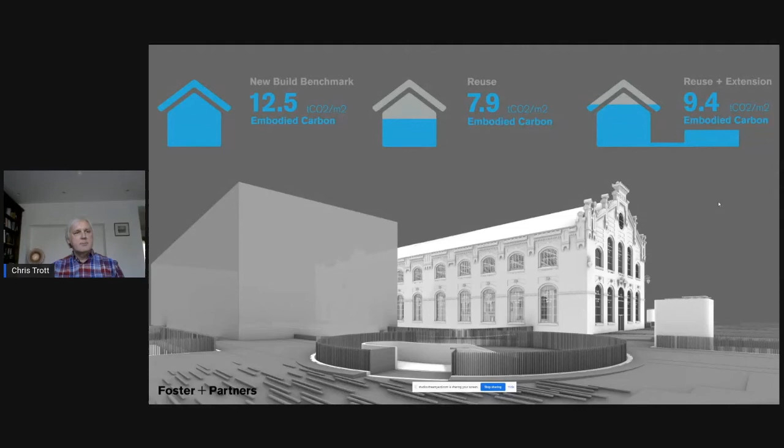We retained all of the original trusses in the roof. We put in timber mezzanine flooring, sequestering about 1,640 tonnes, and we retained 10,000 tonnes of original masonry and brickwork.

This is an internal shot of the building, which opened about a month ago. All of that timber there is prefabricated and demountable.

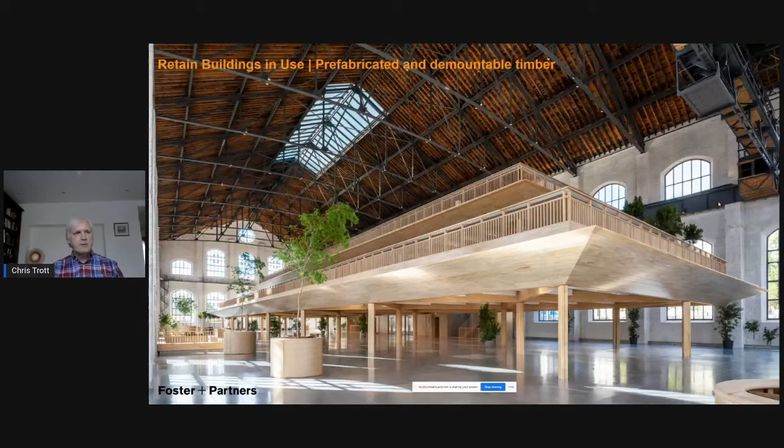Externally, we reconditioned all of the brickwork so we could reuse it. We regenerated the landscape and offered back a new public realm, and the whole building was retained in use. We reintroduced ecology and are encouraging biodiversity on the site.

So going back to my original slide, we reduced new resource use, we reduced CO2 and other waste streams, we reduced climate change, and we increased the regeneration of ecology and biodiversity and other species. We increased value retention in the existing asset on the site, which is going to enter fit out shortly, the base building having already been handed over as complete.

So thank you very much for listening, and I look forward to any further comments you might have in the chat.

Thank you, Grace. Thank you. What a beautiful design, we almost missed it. Thank you for the experience today—it feels nice to bring you back in this kind of technical disruption.

How are you feeling? All good, thank you, with 3 screens and various different calls. Hopefully that one, I can see it on the screen at the moment, so hopefully this one's working.

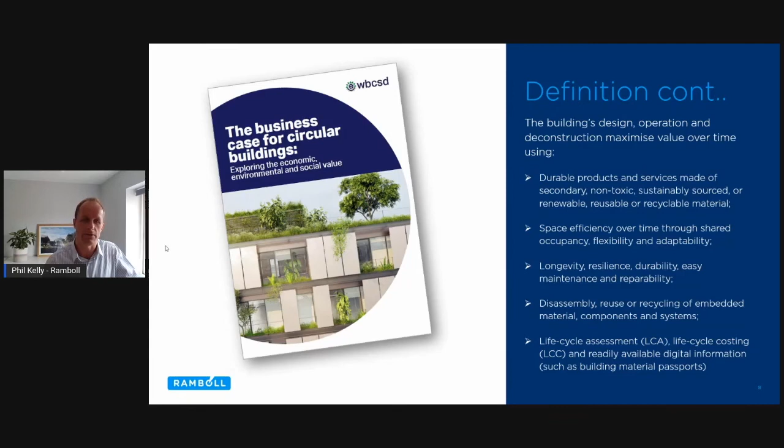We look at those three different types of value. So first of all, economic value. Will there be a reduction in the operational expenditure or the capital expenditure or the purchasing of materials associated with adopting circularity?

What are the environmental benefits? Is there an upfront carbon or a life cycle carbon saving, reducing material that goes to landfill? What are those environmental benefits?

And then finally, the social benefits as well, be it jobs, be it supporting local economy, supporting local social enterprises. Looking at these three values, they're going to be different for different people within the value chain.

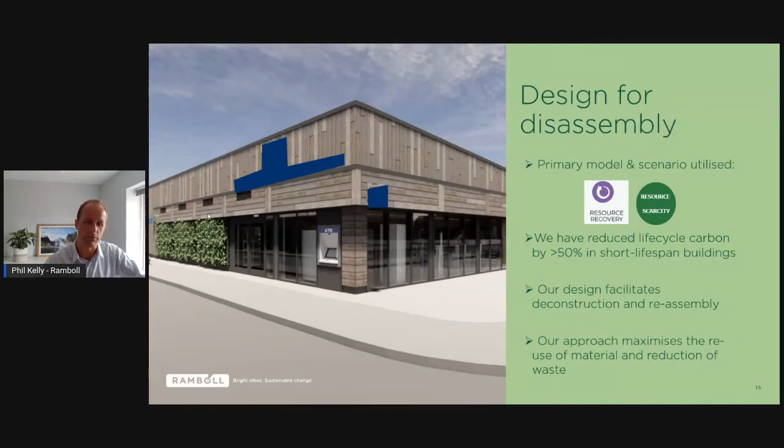This is an example whereby we know that the life cycle or lifespan of this building is particularly short, perhaps 25 years in comparison to buildings with longer lives. Therefore, we've explored models of resource recovery and also looked at the future scenario of virgin material resource being more scarce. By using not just low energy and low carbon materials, but also adopting design for disassembly techniques, the entirety of this asset can be dismantled, deconstructed, and then reassembled in a different location. By doing that, we've facilitated a 50% reduction in the life cycle carbon of this asset.

Looking beyond a single asset case, we're working a lot in the sports and recreation sector. By spending, as it were, some embodied carbon in refurbishing this particular arena, we're going to facilitate not just delivering the annual sporting calendar of one arena, but also of an adjacent arena as well. So being able to combine all of those calendars, all of those events across the year into one aspect, the carbon emissions associated per visitor is actually significantly reduced.

So considering sustainability at a much grander, bigger scale to look at carbon in a different metric, looking at sharing platforms, using the asset as efficiently as humanly possible, and also in cognizance of the fact that people are going to be demanding more and more sustainable events within this sector in the future.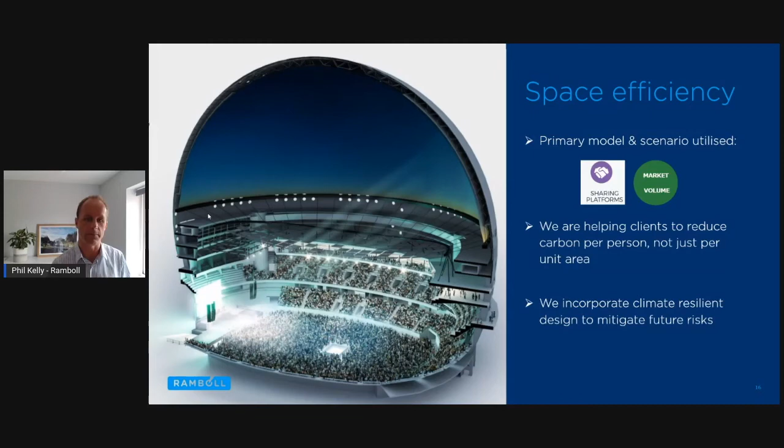Again, working with clients, we are continuously trying to forecast what is the demand of the future. Working with clients that are constructing buildings to lease out to tenants, be that an office or other types of spaces, what are tenants going to be demanding at the point at which this construction is finished? But also in 5, 10, 15, 30 years' time, we want this asset to continue to be of high value and to be incredibly appealing throughout its life cycle.

So we're exploring many different construction details and testing them on site, looking at different ways that buildings can be adapted to meet the changing needs of the future.

Extending the product life cycle is obviously a key model that came into this business case opportunity, and looking at legislative change. Now, in London, the local planning authority or municipality is actually taking a lot more interest in construction projects that are proposing to demolish existing buildings and rebuild on top of them. So again, the ability to continue to adapt our existing buildings is only going to become more and more important in the future.

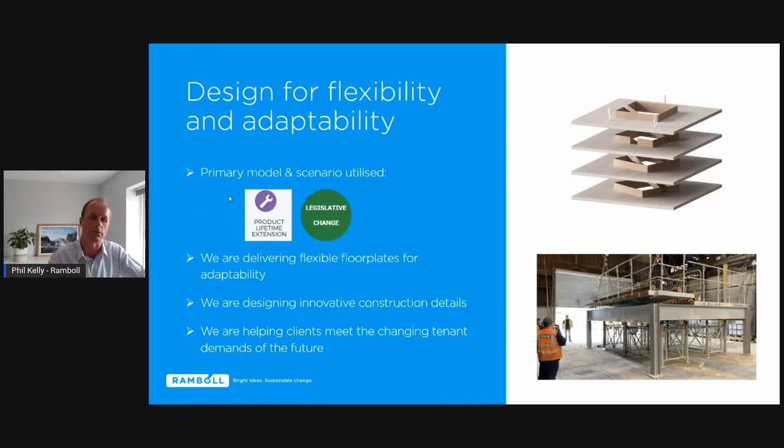Ramboll are also experts in timber construction and modern methods of construction, which includes off-site manufacture. Now, the benefits of employing these methodologies are not just using low carbon building materials, but a significant reduction in waste, incredibly efficient use of material to construct those buildings, but also significantly shortening the construction time on site as well. So there's economic, environmental change, and also by supporting local manufacturers that adopt these practices, it certainly supports them in increasing the skill set within our industry, which has a societal change as well.

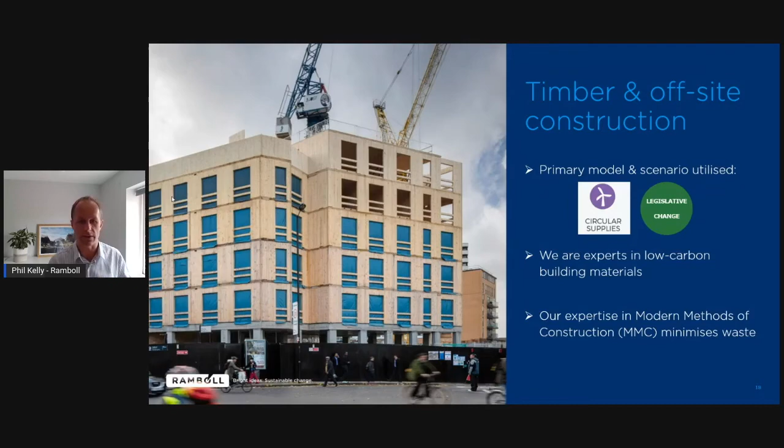So again, circular supply opportunities, looking at the legislative change of needing to use low carbon building materials throughout the future. Circularity was a big part of this project for us.

Net zero carbon arguably is an element of circularity. When we say circularity is the reduction or minimization of resource use, that includes energy across the entire life cycle. Ramboll are delivering a number of net zero carbon new construction projects, which is good, but arguably more important is our work transitioning existing assets to net zero carbon. Now, a couple of the fellow presenters have already said that in 2050, a large proportion of those buildings in operation are already in operation today. So we're going to have to get really good as an industry at transitioning all of our existing building stock to hit that net zero target.

We've helped a client look at this 1970s office building, adapting the facade, the systems, the renewables, doing that waterfall approach to actually achieving net zero and continuing this product's lifespan as long as humanly possible.

Lastly, I'd like to bring your attention to the opportunity to reuse materials. In Norway, Ramboll operates an online platform called Rehub. We understand that the opportunities for circular supplies and circular materials are only going to increase.

The opportunity for sharing platforms and these building models will only facilitate a circular construction industry in the future. Considering future scenarios with increased costs, reduced availability of virgin material, and continued market growth of sustainable construction techniques, this facilitates people both selling and procuring reused construction material online, and helps achieve recertification so it can be used in other areas too.

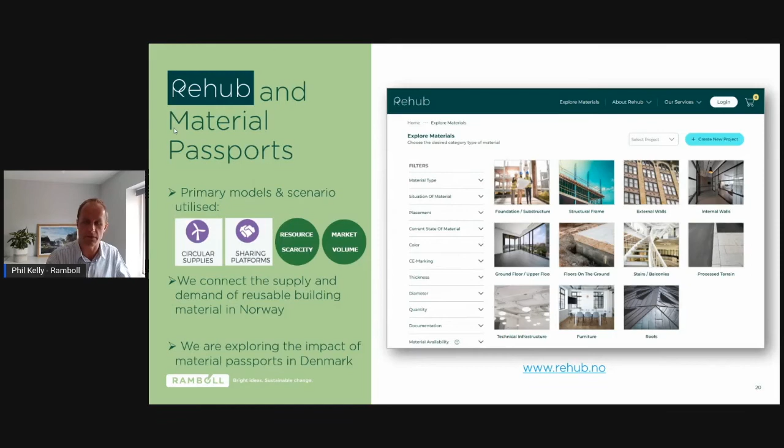So again, hopefully you found today's content interesting, and I'd be happy to engage with anyone who wants to know more. Joy, thank you very much.

Thank you, Phil. I can see that the business case is a super important message for us, especially at this beginning of the transition, we need these kinds of strong statements to show that it can be done and what benefits all stakeholders are getting. Thank you so much for sharing. Are there any questions or notes in the chat box? Continue to put them in if you have any questions for Phil or any other speakers.

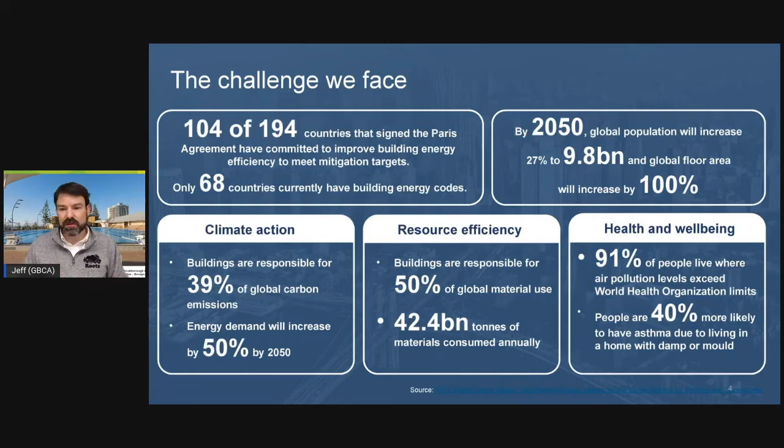We want to get there, but I don't need to revisit all the stats around the challenge we face. We know the built environment is going to double by 2050, which is huge. And there are very significant issues, problems, and challenges we have to deal with around climate action, resource efficiency, resource use, and ultimately the health and well-being of the people using the spaces.

From our point of view, we also have another challenge here. Australia is a big country - it's very unique, quite big, and quite empty. It's not very dense. From a population density point of view, I was looking at this a few minutes ago, and you had something like 3 people per square kilometer, compared to Singapore, which is over 8,000 people per square kilometer.

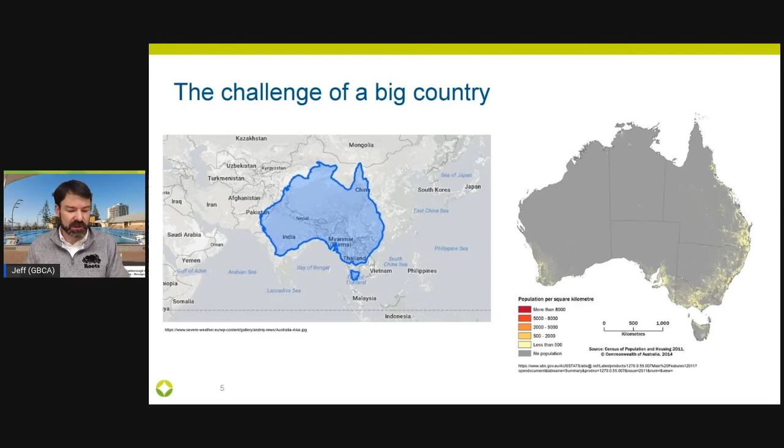So from a circular economy point of view, imagine you're on the West Coast and you've got a business with some sort of take back scheme, and you wanted to support your market in that respect, and you supply most of your products to the East Coast - that's a huge barrier to potentially influence. And you can see a lot of people saying, well, I don't want to push that far. So we've got some work to do, and that's no excuse. It's just a challenge of a barrier that we're going to try and knock down.

So what we've been doing, we've had a look at ourselves and said, well, what can we do to try to influence more sustainable outcomes in the products and services space, particularly around resources and circularity? When we look at the different areas we influence, whether it's advocacy, collaboration, education, or the rating systems, we're pretty good with the buildings. We spend a lot of time working with the owners, developers, consultants and the like. To a certain degree, we're doing all right with advocacy to government, and there's certain areas where we've got a lot of runs on the board, and some other areas where there's work to do. But we realize with products, there's quite a lot of work we can do. So it's a huge opportunity for us.

Products and materials have also been involved in Green Star for quite a long time. We were looking at this and saying, well, if this is an area we can influence, maybe it's the way we look at how we define products, to take on a bit more of a significant structure around resources and circularity. So this is a big piece of work that we're doing at the moment.

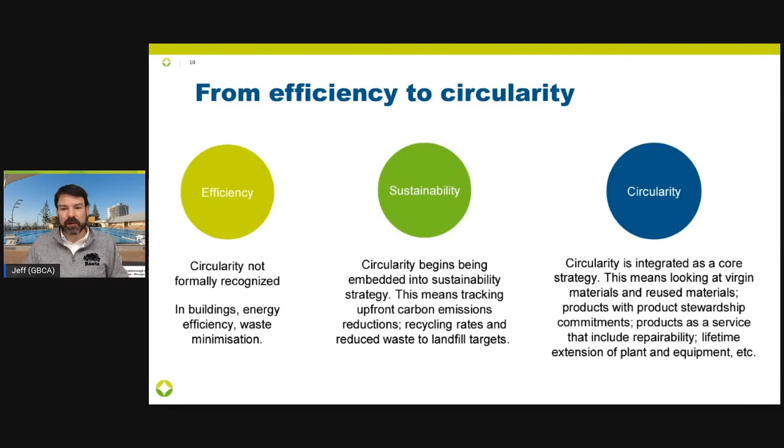When we did our engagement study, some of the feedback we got was quite interesting. As you can imagine, a lot of people think about resources and circularity and circular economy as heavy recycling, or 'recycling on steroids' is a term that comes up quite a bit. So we found that a lot of people really thought of it as just recycling. There's a lot of people who really don't understand it or are very early in their journey with the circular economy.

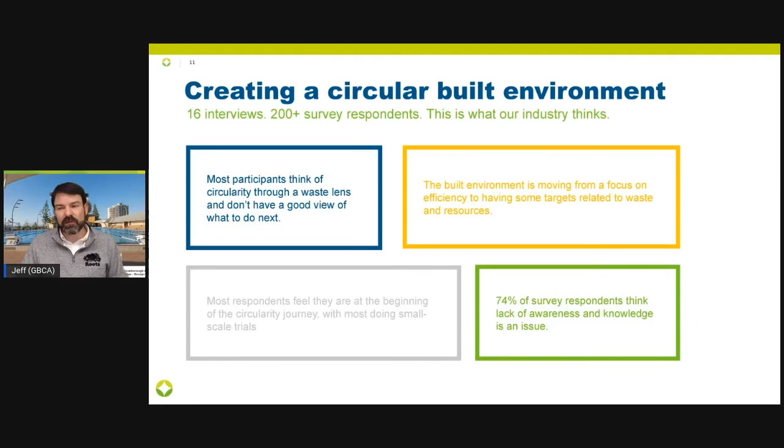This lack of awareness, and the importance of training and development and the work we're doing with organizations like the World Green Building Council and all the speakers we've had so far to help build capacity, is really key if we're going to tackle this properly.

So for us, this is also a huge opportunity. In Australia, we know that the building materials sector accounts for about 8% of Australia's total emissions, so it's a pretty big number and we've got to try to reduce that. As our grid electrifies, the upfront or embodied carbon content is going to get much higher, and the operational content is going to get much lower, so we're going to have an even sharper focus on this.

But what's been highlighted a couple of times tonight is there's a huge opportunity, a huge financial business opportunity, for organizations that want to jump in and really start to solve some of these problems.

So for us, we're wrapping up our strategy around how we attack the circular economy piece as a combination of advocacy and education, to incentivize or support governments to look at circularity within the work they do, as well as the education that underpins this. We're working closely with our product manufacturers and the product certification schemes here in Australia to get them across what circular economy is, and incentivize them through our rating system, which is Green Star.

As an example, within Green Star we have different credits, similar to a lot of the other rating tools. We developed one earlier last year on the circular economy. This is really trying to encourage project teams to look for more circular economic approaches to their work and giving them credit for it. The idea is we can take that information and spread it out widely and broadly, and hopefully get more uptake as this space emerges.

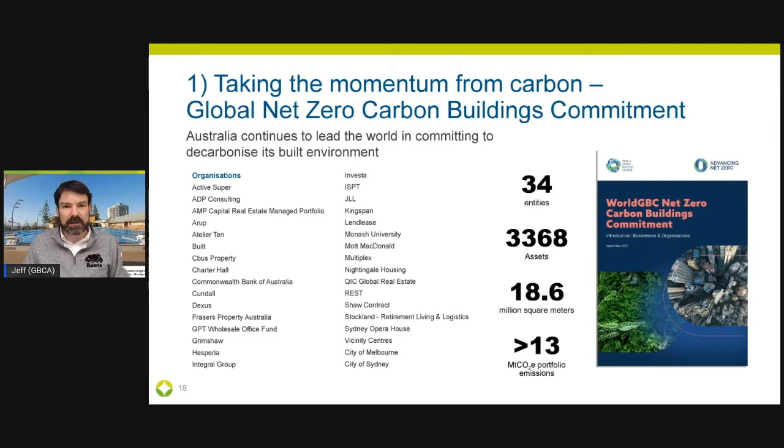Getting to net zero also encompasses a pretty important piece of the operational side of things, how renovations and retrofits are undertaken, and circular economy fits directly in there. So we've got all sorts of organizations demanding this, and I'd recommend, if any of you are interested, speak to your local Green Building Council or join the team to get more information. The other one is around procurement, and more procurement, and more procurement.

For us, we're spending time working with government agencies to try to embed circular economy thinking very early in the piece, around procurement. Because if we can get contractual language defined at the contract stage, right at procurement, this helps set the trajectory for how projects are delivered. We've been working with NatSpec to design specification clauses that builders and contractors can just lift and put into contracts, requiring them to consider circular economy objectives. If we can do that and get the broader built environment to think that way, they'll start to learn the expectations, and things will expand from there.

There's actually two ideas left. First, local partnerships and global supply chains. Working with organizations like the World Green Building Council and other big rating tool bodies, we've got a really strong collective will among independent organizations in our broader community, and we can bring them together to galvanize everyone's collective will, so we're not randomly running around doing different things. This is really important - we can do great on one building or a bunch of buildings, but unless we have everyone on board, we're not going to make the progress we need.

The other idea, which we're really focusing on, is moving away from focusing on the products themselves. We want more sustainable products with circularity built in, and we want to continue doing that, but we also want to influence the actual suppliers of the product. If we can get a supplier to change the supply chain of all their products, that's going to have a way bigger impact than just asking for their green range of products while everything else stays the same, leaving the buyer to choose whatever they want. We want to go straight to the source and influence the top, so everything else filters down. I'll stop right there.

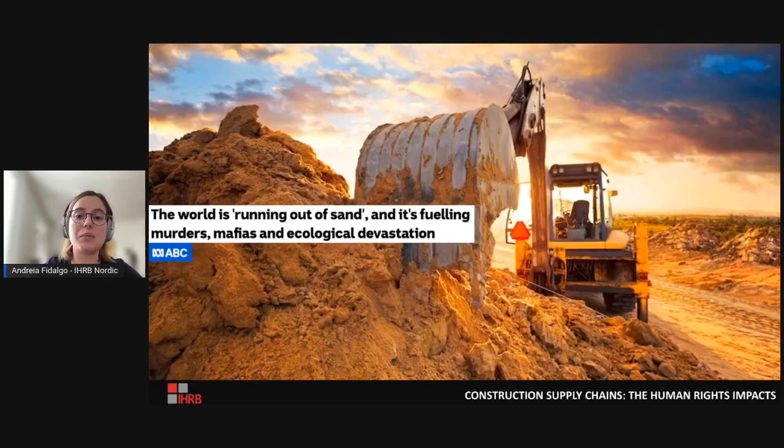We see today in some places where the demand for sand is so intense that organized criminal gangs have taken over the trade, and this has had major social implications and human rights risks.

The same goes for the overexploitation of forestry and logging, as timber is today more and more used in construction, where key human rights risks are related to workplace conditions, particularly health and safety, threats to livelihood and life due to significant use of resources including land, water, and forest, and impacts on existing transport networks, local infrastructure, and indigenous people's rights.

Shifting to a circular building and construction will have a definite impact on the supply chains. It is important that we identify which countries, communities, and workforces can be adversely affected in the process. Poorer countries that rely mainly on extractive industries and have economies firmly based on a linear model are the ones that can have more significant impacts if we don't create the right policies and strategies for economic diversification, reskilling of workers, and better human safeguards.

These countries will need support from the international community through targeted assistance programs if international trade in established commodities and manufactures declines in the medium and long term.

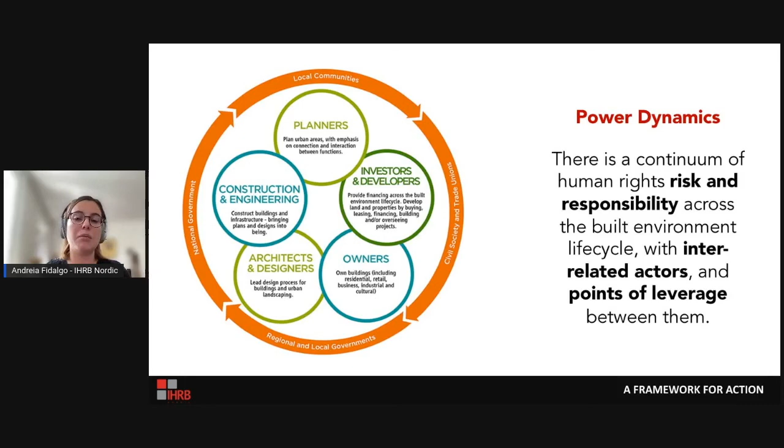So what am I saying in practice, and how have we been implementing this? For the past 2.5 years, we've been working with the municipality of Bergen in Norway, developing a project pilot where our framework for dignity in the built environment has been used as a guiding tool to minimize social risks and maximize social opportunities.

Behind what I've just shown you sits a huge Excel sheet that for each stage of the construction life cycle has a set of guiding questions related to the relevant human rights standards and the Sustainable Development Goals, as well as practical examples. So if you're the owner, developer, a community member, the design team, the architect, you can look at these guiding questions and think about what the social risks are, and how they can be prevented and minimized.

For this specific project in Bergen, it encompassed the conversion of an old teachers' college into a new reception center for newly arrived immigrants and refugees to the city of Bergen. The project involved not only the refurbishment of an old building, but also demolition and new construction. Circularity played a prominent role.

By involving the future building users and the surrounding community, the reuse and recycling of materials took another dimension. For example, some of the social workers who will be working at Bergen's Inclusion Center were actually trained and educated at the old college. For them it was really important to preserve some of the existing wood panels and lamps, because it was important to keep the legacy and history of the building.

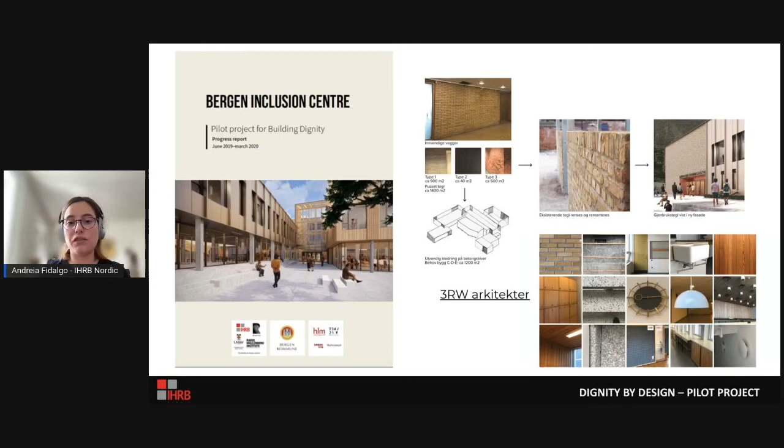To finish, as Esther from CDL said earlier in her presentation, we need to bring all parts into the process in order to move the needle. I really want to elevate the importance of doing so from the very early stages. One of our mantras at IHRB is that the earlier we involve all interested parties in the process, the better the chances for a positive and significant impact, and the better the opportunities to achieve a just transition in the built environment.

So I'll finish here. Thank you so much. Please reach out to us if you're interested or if you have any questions.

Thank you so much. Thank you, Andreia.

This is really a beautiful message, because whatever we're doing for climate action, resource and circularity, health and well-being, these are the most important things we're doing for ourselves. We really need to take care of ourselves first to really see what is the human right, what is the justice we're making forward. This is a very crucial and important message I really wanted to end today's webinar with. I'm sure everyone has walked away with a lot of important messages, but please remember this one, because you're doing everything for yourself, for humankind, for families, and for everyone on Earth.

Thank you so much, Andreia. Thank you so much, Jai. Thank you, everybody. Thank you.